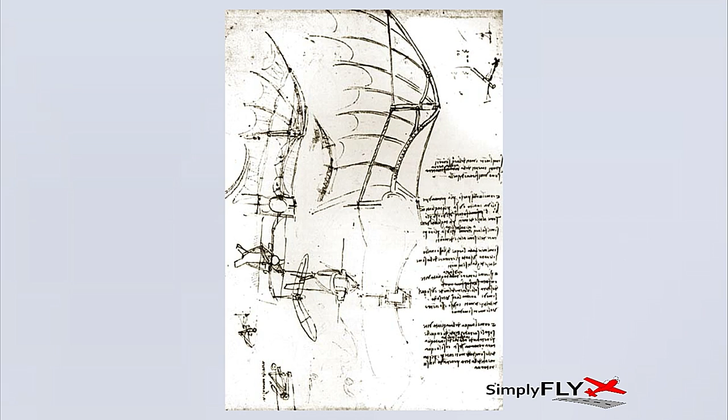Leonardo da Vinci, an early pioneer in trying to devise a mechanism to fly, was crazy about trying to figure out how to take the power of man's muscles and devise some type of system to get the wings to flap. Of course, that idea was just not going to happen. It's not physically possible to do that. But what he did serve to do is keep that dream and that desire alive.

113 years ago, the Wright brothers were finally able to conquer flight, the first heavier-than-air powered flight. What we have today is a picture of an airplane. We have finally figured out how to fly.

How do we do it? It's really just a question of balancing forces. We have forces on an airplane that are always exerted on that airplane while it's in flight, and there are four of them: lift, drag, weight, and thrust. These forces, when we're flying, need to be in a state of equilibrium. So two of these forces will always oppose each other. Thrust will always be opposed by drag, and lift is always opposing weight.

The thrust and the weight I want to talk about just real quick, because that's an easy one for us to understand. Weight, we know what that is — it's gravity, what keeps us firmly attached to the earth. Thrust, we can understand because we've all driven a car or been in a car — you step on the gas, you're thrusted forward. The two that we don't necessarily understand real well are lift and drag, so those are the two that I want to talk about today.

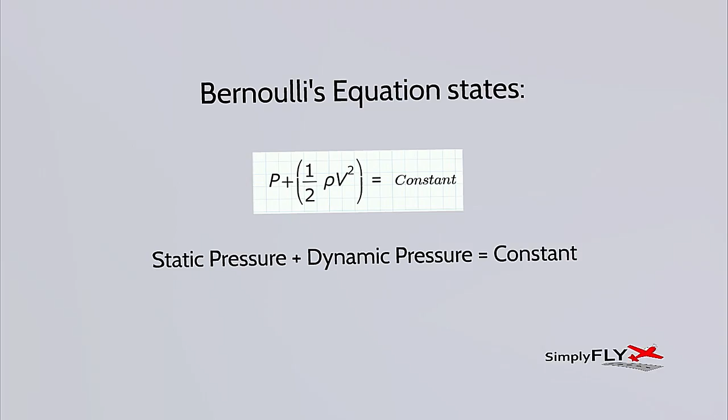Bernoulli — if you know anything about aviation and flying, you've heard this name, and you probably think he must have had something to do with designing airplanes. He actually died back in the 1700s, had nothing at all to do with airplanes — actually died before the first balloon flight by the Montgolfier brothers. What he was doing was studying flows, water flows in streams, and studying the pressures. The Bernoulli equation states that static pressure plus dynamic pressure equals a constant.

Static pressure, static means at rest - the air is not moving, or in his case, the water wasn't moving. Dynamic pressure is the movement of the fluid.

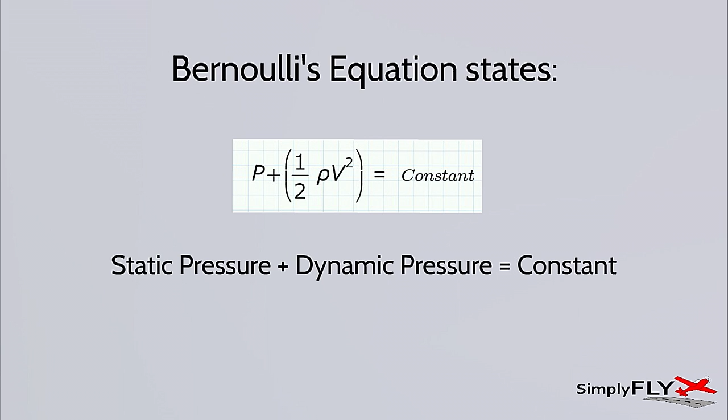So if we look at this in the concept of a box, picture a square box with no air moving through it - the air is static. Let's say, as an example, that the air is exerting a force of 10, just to use a nice easy number, on all four sides of that box.

If you move air through that box and add some dynamic pressure to it, you put a plate up and you could feel and measure the pressure. Let's say you move air through that box, take two sides out, and move air through it such that you have a dynamic pressure of 7.

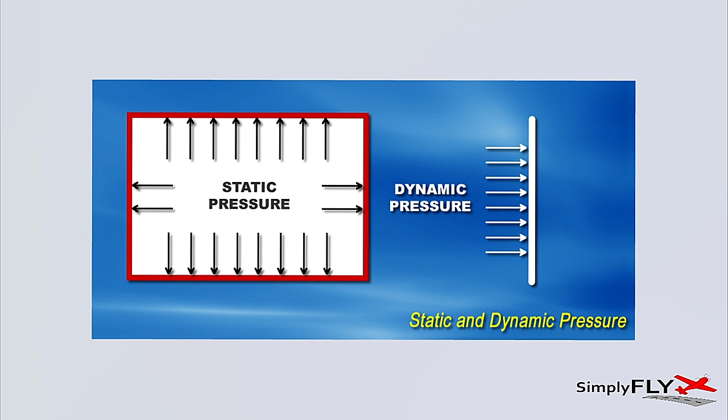Well, then what has to happen per the Bernoulli equation is that the force that was exerted on the sides, that was 10, has to decrease. It has to go to 3, because the static pressure plus the dynamic pressure always has to equal a constant. So when the air is not moving, if the static pressure is 10, it's 10. If the air begins to move at a rate of 7, the static pressure has to drop to 3. That's the Bernoulli equation. I'll tie this into what it means for lift in just a minute.

Let's look at the law of continuity. The law of continuity really is simply the law of conservation of matter applied to a moving fluid. And air, when we talk about aerodynamics, we're really talking fluid dynamics.

Air, although it's compressible, until you get near sonic speeds and the speed of sound, where air has some compressibility to it, when you're at slower speeds - 100 knots, 200 knots, 300 knots - air does not compress, and it acts just like a fluid. So fluid dynamics works great from a mathematics standpoint when we talk about lift and aerodynamics.

The law of continuity states that area times velocity equals a constant. Take a hose and turn the water on, and the water is coming out at some velocity. As soon as you put your thumb over it, maybe cover it up halfway, what happens to the velocity? It increases, doesn't it? It starts spewing out. So area times velocity equals a constant.

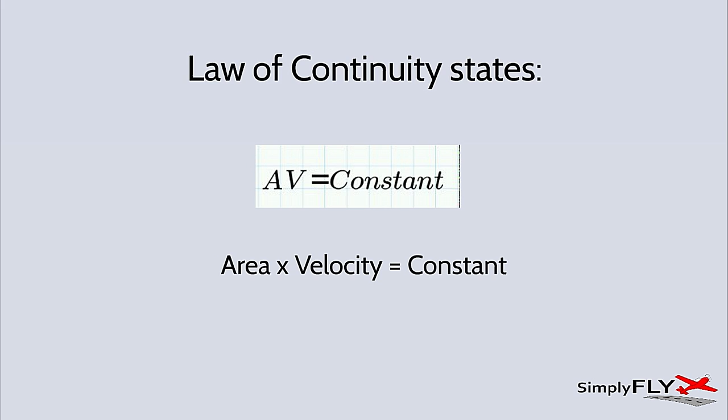This is the concept we see in a venturi. A venturi is simply, let's say, a cylinder that has a reduced, choked-down section in it. So what you see on the screen is a venturi tube, and it has a wide end, and then it narrows down. Let's assume for a second that area A1, in this case, is 9.

And the velocity of the fluid is 3. Law of continuity says area times velocity equals a constant. 3 times 9 equals 27. What happens then when that area gets choked down? Let's say area 2 is 3. What happens to the velocity? It goes up. What's it go up to? It goes up to 9 - it has to speed up to 9. Those two have to equal out.

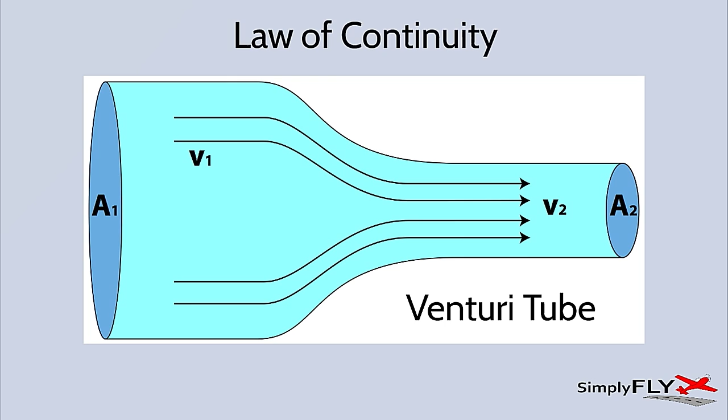Before we talk about how that affects lift, I want to talk about airfoil terminology so you can stay with me through the slides here. What you see on the screen is a picture of a typical airfoil - this is what's called an unsymmetrical airfoil, meaning it has more of a flat bottom than a curve on the bottom. There are a couple of things here we want to point out.

The first one that's extremely important is the angle of attack. The angle of attack is the angle between the chord line, which on the diagram is that red dotted line, and extends as an imaginary line from the extreme leading edge of the airfoil to the trailing edge of the airfoil. That's the chord line.

The angle of attack is the angle between that chord line and the relative wind. Relative wind is defined as that wind that is opposite and parallel to the flight path. So, if I'm flying along like this, the relative wind is opposite and parallel to the flight path.

If I'm flying like this with the nose way up in the air, but this is my flight path, the relative wind is opposite and parallel to the flight path. It doesn't have anything to do with where the wing or the nose is. It has to do with where the airplane is moving. It's an important thing to understand.

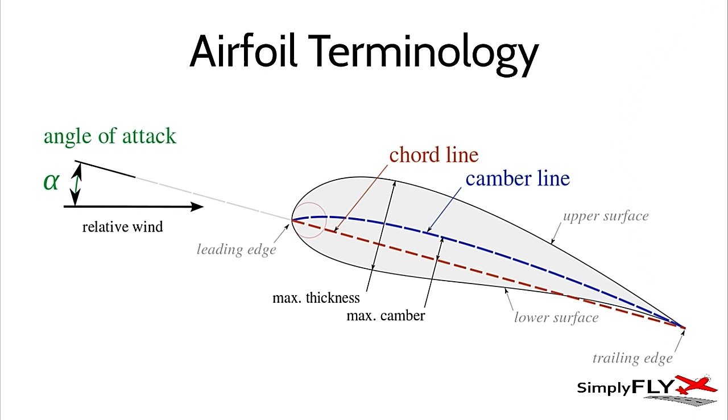So angle of attack and chord line are important, as well as the fact that this is an unsymmetrical airfoil. If it were symmetrical, the shape of the wing above the chord line would be identical to the shape of the wing below the chord line. That would be a symmetrical airfoil.

So let's look at how air moves around the airfoil. The oncoming free stream air, as the airplane is flying through the air, that air is going to hit that airfoil, and it's got to do something. It's got to split and go around that airfoil. Where the oncoming air hits the airfoil is called the stagnation point. And at that point, air's got to make a decision: go over the top or go underneath the bottom.

The air that goes over the top, in the case of this particular airfoil shown, if you visualize that airfoil and the chord line, that chord line now goes from where the stagnation point is to the trailing edge. That's now our chord line. And if you look at how much area of wing is above the chord line versus what's below it, you see there's more area on top of that wing.

What we've done there is we've created a venturi. That air is being choked down by more area of wing on the top. What does the law of continuity say? It says that as the area is decreased, the velocity must increase. So as that air hits, the speed has to increase to go over the top surface. It goes faster over the top than it does under the bottom, because of that curvature we call camber, the curvature on top of that wing.

When the air speeds up, now Bernoulli's principle comes into play. The air speeds up, therefore the pressure on the top of that wing drops, and the wing is physically pulled up into the air because of the differential pressure on the bottom.

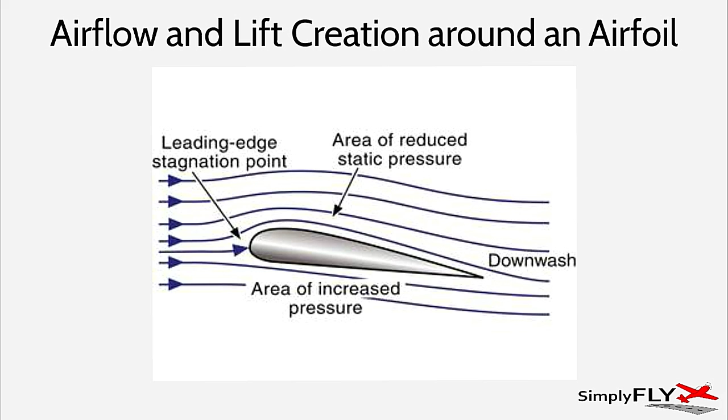But we haven't talked about Newton yet. Newton has a little bit to say about this too, and here's how Newton plays into it.

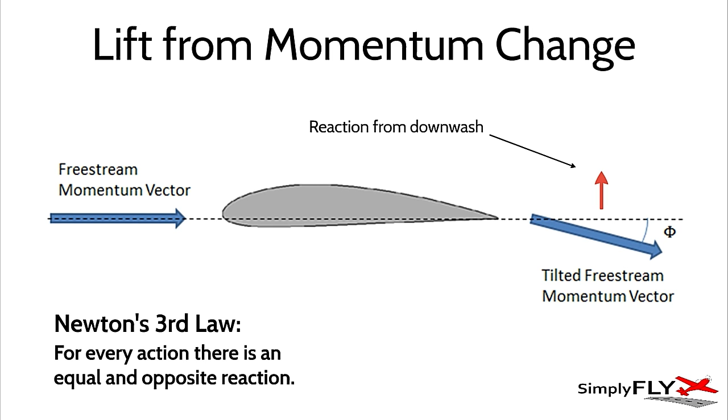When that air goes over the top surface of that wing, it doesn't just go over and then go straight again. There's some downward deflection to that air. It can't just end up back in the free stream direction it was going. That downward deflection, called downwash, causes an action. What does Newton's third law of motion say? Action, reaction. Every action has an opposite and equal reaction. So you have additional lifting force because of the downward momentum vector from that downwash. That's how Newton plays into this equation.

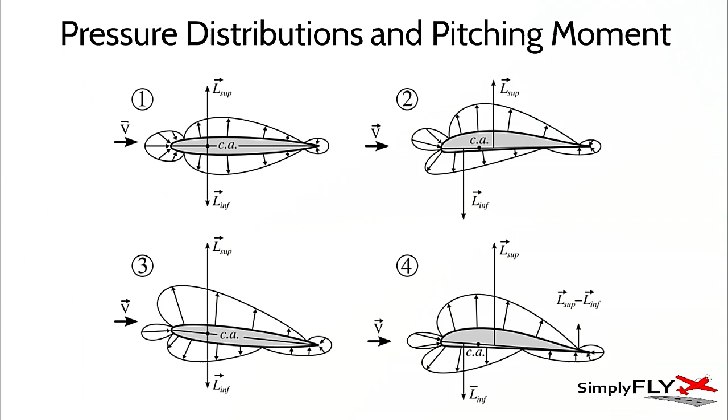If that wing is out there flying by itself, it wants to tumble. You have positive lift out here, negative lift over here, and it wants to get a rolling moment, a nose-down pitching moment in that unsymmetrical airfoil. Look at diagram 4, here we have positive lift because of the angle of attack, and we're creating more positive lift.

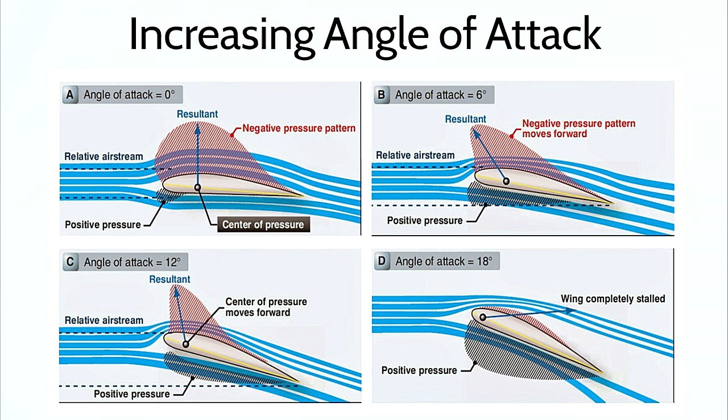What happens at that stagnation point? Air's got to make a decision. Some goes down, some actually retreats and moves up over the top surface. You can get to a point, an angle, where the air just won't make it anymore. I'm done, I quit, I can't get around. That's the stall. The air detaches from the surface, the wing is stalled, weight now takes over, and we begin to descend. That's the stalled condition.

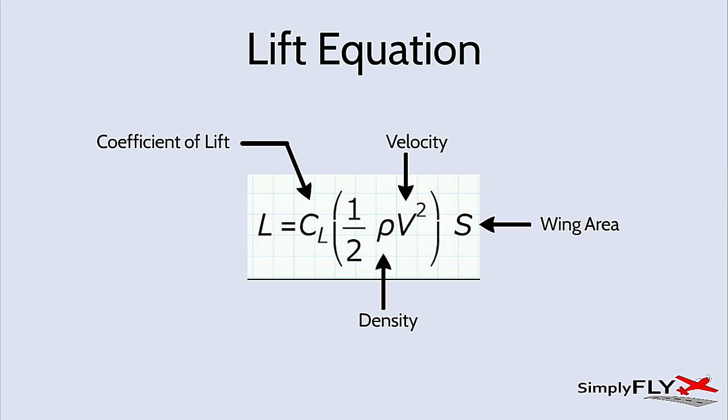If we are in thick, dense air, like on a cool day at a sea level condition, the air is very dense. The denser the air, the more lift is going to be created.

As we climb in altitude, we get up to the higher altitudes and the air becomes very thin. The lift equation tells us that we're not going to have as much lift because the air is much thinner. Or in order to create the same amount of lift, we have to do a couple of things.

We either have to increase the coefficient of lift, which we can do by increasing the angle of attack, which we'll talk about, or we have to increase the velocity, or we have to increase the wing area. Well, it's not easy to increase the wing area. It's kind of built that way. There are some things you can do, but from a general standpoint, you can't really change it too much.

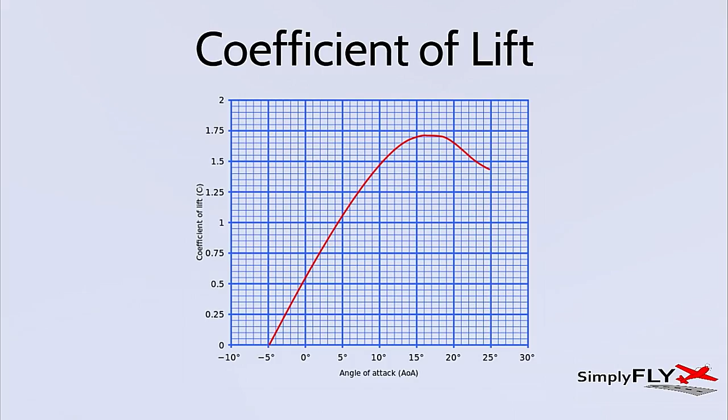As the pilot, it's nice to know the angle of attack that we're flying at, and newer aircraft now have angle of attack indicators in them, which helps give us that information. We still don't necessarily care what the angle is, we just care that we're getting close to it, okay?

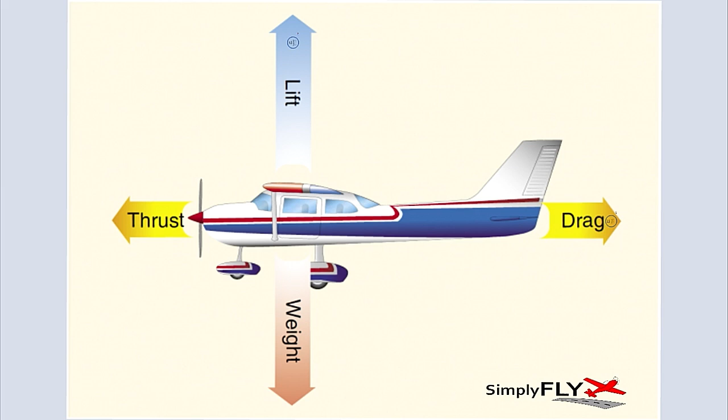Okay, that's lift. Let's talk about drag for a second. Drag is a force that we can understand one part of as it pertains to flying. We understand parasite drag because we've all driven in cars and stuck our hand out the window - we feel the pressure drag, parasite drag, kind of means the same thing.

In an airplane, in designing an airplane, there's three parts to parasite drag: form drag, interference drag, and skin friction drag. All three of those in summation make up parasite drag. We're familiar with all of that just driving a car - automotive designers think about form, interference, and skin friction drag. What they don't think about is induced drag, because it doesn't apply. We'll talk about parasite drag first and then get into induced drag.

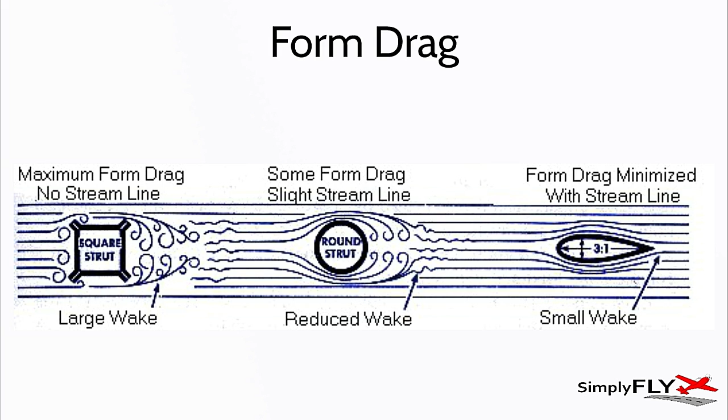That's the form side. Another way to think about the form side is this: if you took an airplane, stood right in front of it, made a plywood cutout of the shape of that airplane, and then tried to push that plywood cutout through the air at 120 miles an hour - that's form drag. There's quite a bit of it.

Stick landing gear on it, creates interference. Put wing struts on it - where the wing hits the fuselage, where the strut hits the fuselage, where the strut hits the bottom of the wing - creates interference. That's interference drag. The last type of drag is skin friction drag.

If you took the skin of the airplane and peeled it all off like an orange, laid it out flat on the ground, and measured the square footage of that skin area, and then tried to run a fluid - the air - across it, there's friction to it. That air just trying to move past that skin, there's a frictional force dragging it back.

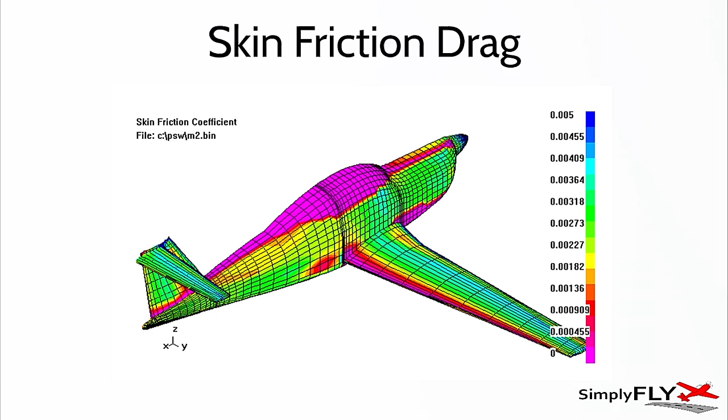That's skin friction drag. So all three of those - skin friction, interference, and form drag - the summation of all three of those types of drag is what we call parasite drag. And again, you find this in auto engineering, in anything that's going to move through a fluid.

You have to deal with these three types of drag. In aviation, we have another one: induced drag that we have to deal with. Induced drag is a byproduct of lift. As soon as a wing begins creating lift, it begins creating drag. It is induced by the creation of lift.

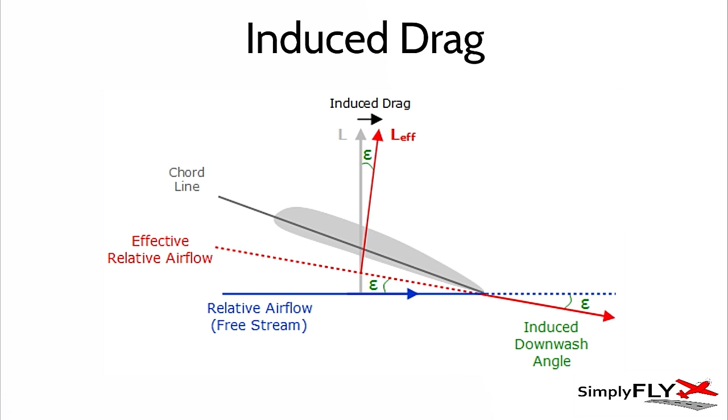So with aircraft, you have parasite drag and induced drag. Parasite drag, we all understand - the faster we go, the more drag we have. Makes sense. Induced drag's the opposite - the faster we go, the less drag we have. Because when we're flying fast in an airplane, the angle of attack is very small. To fly slow, we have to pitch up, increase that angle of attack. As we do that, those lift vectors, the lift vector and the effective lift vector, begin to separate. When you do that, your induced drag gets larger and larger. So the faster we go, the less drag from an induced standpoint, the more drag from a parasite standpoint.

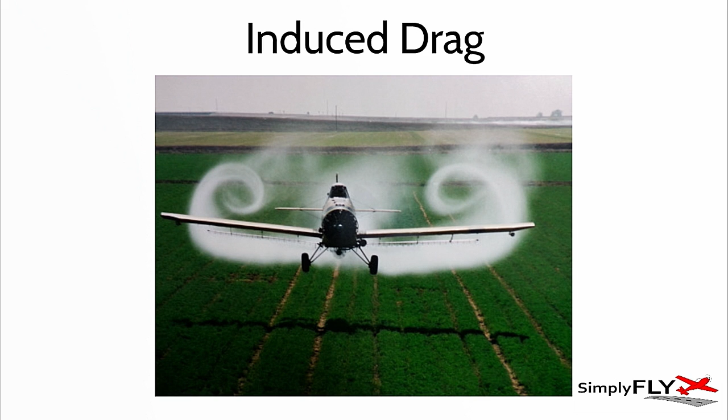It corresponds to a specific airspeed. It's different for every airplane, different for different configurations - if you put flaps down, you change things. But in a clean configuration, by clean I mean the flaps are up, the gear is up, where we have as little drag as possible. In a clean configuration, as an example, that speed may correlate, let's say it correlates to 100 knots. What that tells me as the pilot is that if I want to go as far as possible, I want to fly at 100 knots.

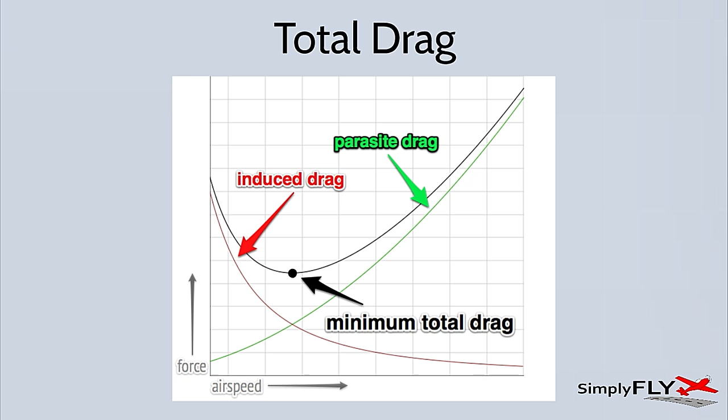The reason for that is because if I go any faster than that, I've got more drag. If I go any slower than that, I've got more drag. I've got more parasite drag if I go faster, and more induced drag if I go slower. So that's an important airspeed to understand, and it's typically - we think about it in an emergency situation - it's the best glide speed. So if you pulled your engine to an idle position and you're just gliding, that's the speed with which you're going to cover the most amount of ground because you're at the least amount of drag. It also correlates to a speed, or very close to a speed we call VY, which I won't get into here today. So that's our total drag curve.

Let's talk about stability and control real quick. We've talked about lift, we've talked about drag. The Wright brothers did something that no one else before them was able to do, and that is they were able to control the airplane.

You had people like Octave Chanute and Otto Lilienthal, who were successfully flying gliders prior to the Wright brothers. But they didn't really have a great method of control. They hung themselves from the bottom of the glider and used their weight, shifting it around to control the airplane. That was okay, and it worked.

But what the Wright brothers did is develop a mechanism for warping and twisting the wings. They had rudders and an elevator. They actually had a canard, the stabilizing surface was in the front. Nowadays you see it in the back of the airplane mainly.

But when we talk about stability and control, we're talking about how we keep the airplane stable when flying. The airplane operates and moves around 3 axes, all of which pass through the center of gravity. Everything has a center of gravity, the center of mass in this case.

We have a longitudinal axis which runs from the tail through the nose of the airplane. We have a lateral axis which runs from wingtip to wingtip, and a vertical or normal axis which operates vertically right through the center of gravity. All 3 axes operate through the center of gravity. The aircraft pitches, nose up and down, around the lateral axis. It rolls around the longitudinal axis, and it yaws left and right around the vertical axis.

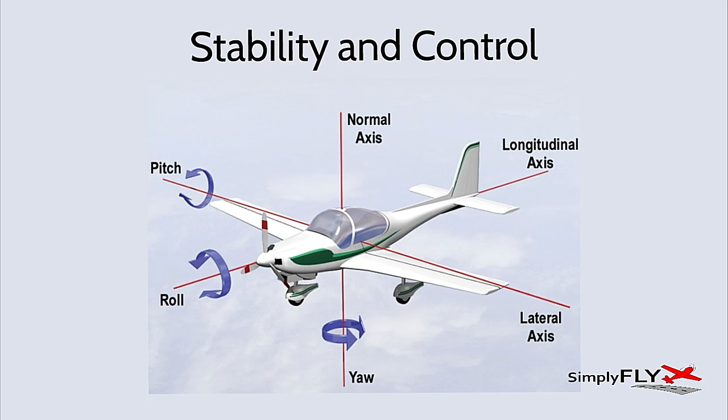When we're talking about stability, we talk about it from a static standpoint and from a dynamic standpoint. Static in this case doesn't mean still or at rest, and dynamic doesn't mean moving. Static means initial - what happens initially to an airplane from a stability standpoint. Dynamic means what happens over time with the airplane when we talk about stability.

Now we're going to discuss stability right now only in pitch, but understand that these concepts apply to pitch, roll, and yaw. They apply to all 3 axes. We just don't have time to get into all of them.

Static stability is initial tendency. So let's imagine we're flying the airplane in a trimmed condition. A trimmed condition means we have adjusted the elevator, which operates when you pull back and forth on the stick or yoke, allowing the nose to pitch up and down. We have a little control surface on that elevator that allows us to lock it in a position where we can take our hands off the stick and the plane will fly fine in whatever pitch attitude we have trimmed it for.

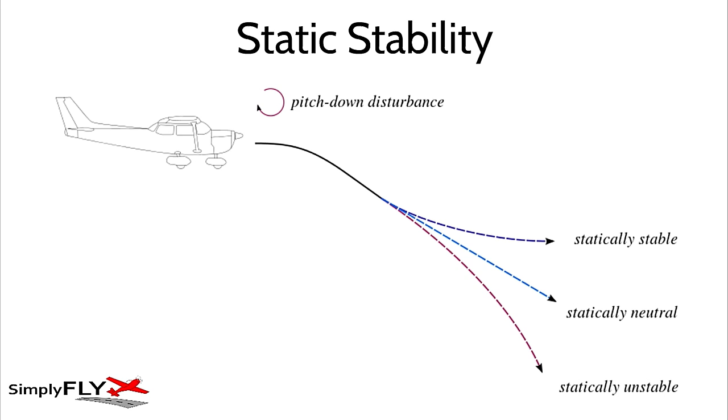So let's assume we're flying along trimmed, and we push the stick or yoke forward so the nose pitches down, and we let go. What happens immediately, what happens initially, that defines the static stability of the airplane. The static stability falls into 3 categories: it's either statically stable, which means positive static stability, neutrally stable, which means statically neutral, or unstable, which is negative stability from a static standpoint.

So if we push the stick forward and let go, and the nose of the airplane immediately says 'let me pitch up' back to where it was, then we have a statically stable airplane, positive static stability, and that's usually what we want in most cases. There are some cases where we don't want that - if we have a fighter airplane or an aerobatic airplane, we want some instability. But for most aircraft, we want a positively static aircraft.

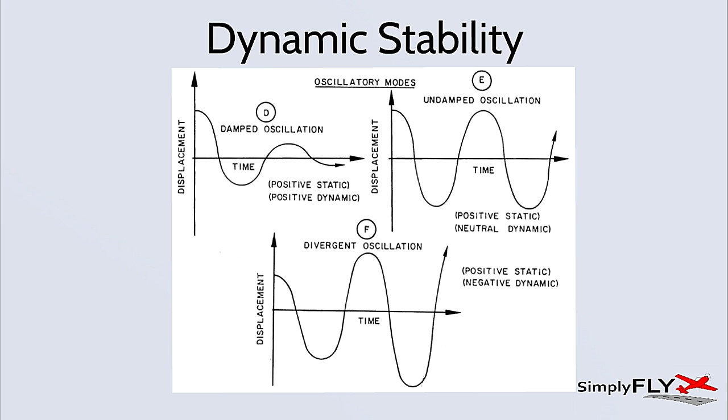We want the airplane to try and initially return to where we were flying. Dynamic stability speaks to what happens to the airplane over time. So let's go back to the example where the airplane is trimmed. It's positively static from a stability standpoint. Now we'll go the other direction. We're flying along, we pull back on the stick or yoke, the nose pitches up, and we let go. What happens? Well, because it has positive static stability, it's going to want to pitch back down. It's going to want to return.

If this is the altitude we were flying at, and we pitch up, it can't just snap back. It's going to fly below our flight path, speed up, climb up, and oscillate. But if, over time, it eventually gets back to the level flight attitude where we had it trimmed, then we say the airplane is positive in dynamic stability. Over time it returns to its trimmed condition.

Same scenario: pull back, let go. If the airplane begins to oscillate, but it just keeps doing that, the same way, all the way to Cleveland, then we say we have neutral dynamic stability in the aircraft. Over time, the oscillations don't get worse, they don't increase, but they don't get any better either. We just fly along like that.

Worst case: pull back, let the nose come up, and the oscillations get worse and worse and worse. In that case, you can expect structural damage at some point in the near future. So that's not a good thing either. That's the static and dynamic stability of the airplane. And remember, that's about all three axes, not just pitch.

An aircraft designer designs the aircraft with roll stability. So if you put the aircraft into a bank, what you'll find is that if you take your hand off the stick, the airplane will start to turn, but it'll start rolling out and go wings level again because it's designed to be stable. If you step on a rudder and kick the nose one way, then take your foot off, it wants to come back because it's designed to want to come back, if it's statically and dynamically a positively stable aircraft.

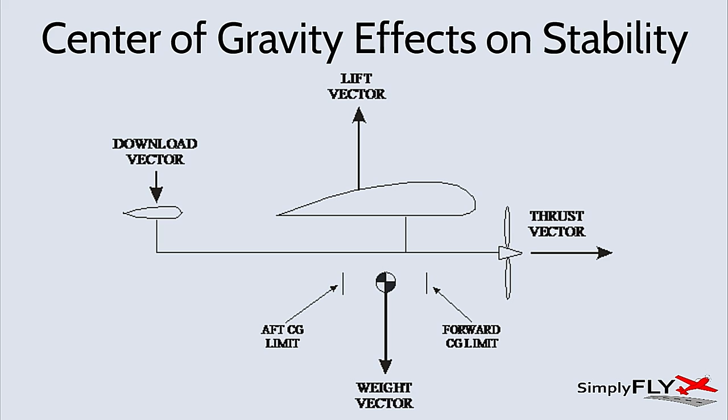When I just talked about static stability - pitch the nose up - if the CG is too far back, you may not get out of the stall. The nose won't want to come back down. So center of gravity affects the stability of the airplane in good ways and in bad ways if we're not careful.